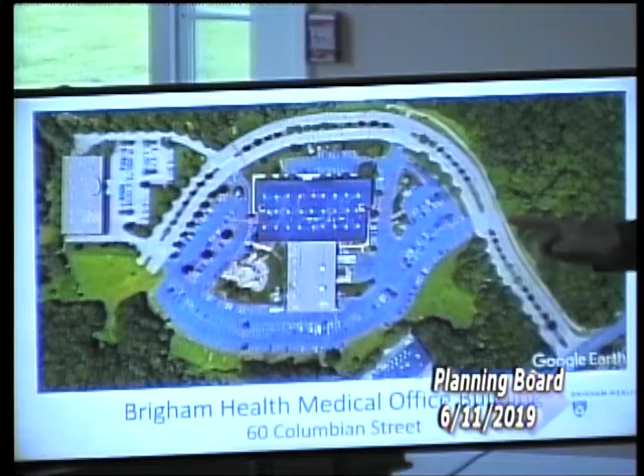I'm going to give you a little bit of background about the building. The 2-story building, which is the front building, was built in 1986. In 1994, the developer actually signed a lease with the lottery, and they built the warehouse in the back, and the lottery has been in the building since 1994. As you all are aware, the lottery is leaving the building.

Brigham looked at a number of buildings on the South Shore, and this building, for a number of reasons, including the location, Braintree, the departments that are going to go into the building. It's a consolidation of really a lot of departments that are in the neighborhoods in Braintree and in Weymouth, consolidating into the site. So if I go to the next slide, please.

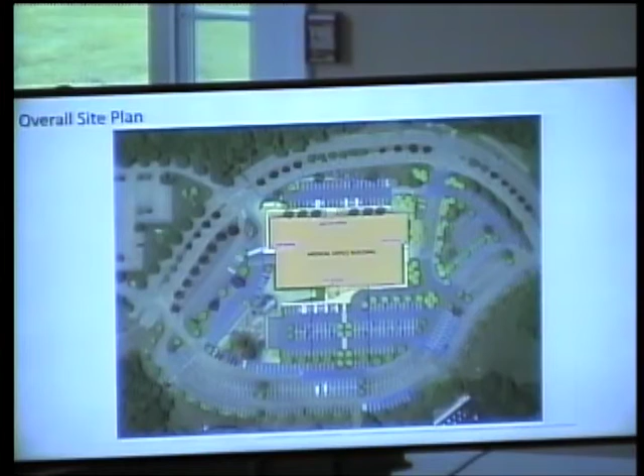Thanks, Lisa. This is an aerial of what the building will look like when it's complete. The 2-story building will stay in place, and if you see this little dotted line, it's actually the warehouse that will be torn down. It gives us a great circulation for parking. Actually, the ratio will be met on the site.

I'll let VHB, who's our civil engineer, go into all the parking ratios, but the flow that's on this now and the circulation, this will actually be the entrance to the building, and really with the volume of the parking for the patients in the front entrance of the building. Great access coming in and then flowing into the building.

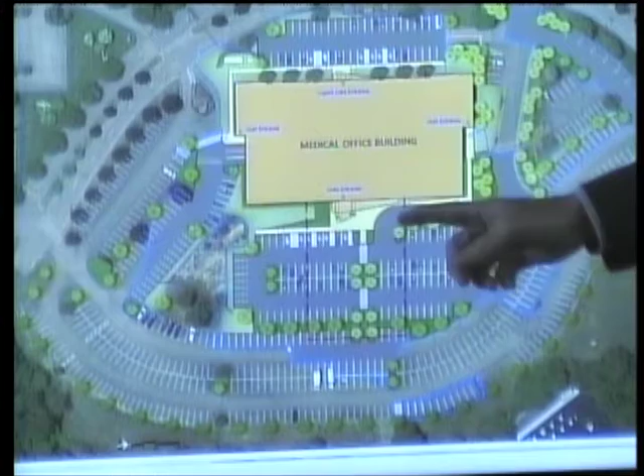The rear will be used as an urgent care, and that will be open beyond just the normal 5.5 days of business.

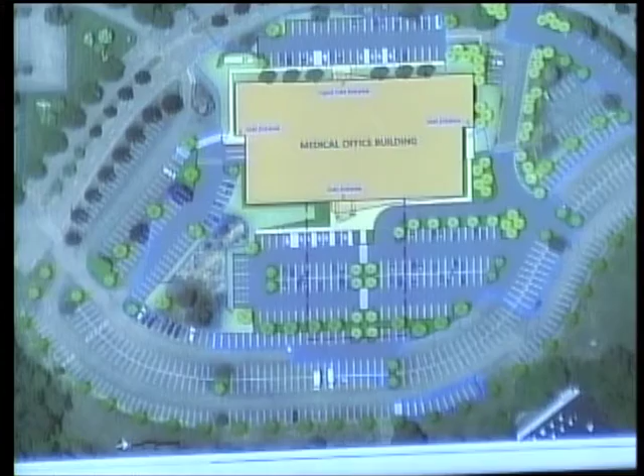That are consolidating into what will be a 90,000 square foot, 2-story building. Some of the groups going in include primary care, urgent care, multiple specialties, lab services, imaging, cardiology, surgical consult, and an endo suite. Our timing is we hope to start construction in the fall of 2019, complete construction in the fall of 2020, and open in the winter, really the first quarter of 2021.

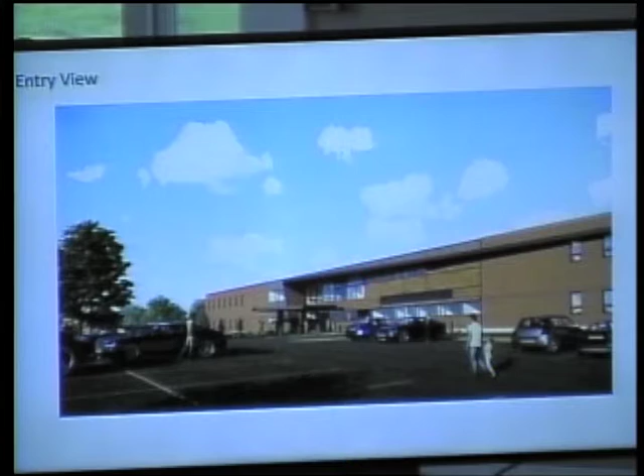One more slide. This is an artist rendering, and the architect is going to address a number of renderings of the building, but this was what the entrance will look like, we hope, when the project is complete. This is actually where the warehouse is now, this opening right here. It really will give a great vista for patients that are arriving, a lot of parking, a lot of room for patients to come and go throughout the building, with employee parking on both sides.

With that, I'll turn it over to VHB, and they can get into some of the more technical details of the site.

Good evening, members of the Planning Board. My name is Lisa Chow with VHB, the civil engineer for the project. As Mark described, the proposal is to renovate and repurpose the site from an existing office and warehouse use to a medical office building use.

This would be the third generation of use for the existing office building. The proposed medical office building is a use by right within the Highway Business District. The reason why we're here today before you is because the site plan approval for the existing office and warehouse requires the proponent to come back before the planning board for a site plan review process if there is a proposed change in use. I'd like to provide a quick overview of the existing site and then discuss the proposed improvements.

The site before you is obviously developed, as Mark mentioned. It consists of a 2-story office building with a 1-story warehouse building. It is currently the site for the Massachusetts State Lottery building, and the Massachusetts State Lottery uses both the warehouse and the office building. Access to the site is from east and westbound on Columbian Street through the signalized shared access drive. There are 4 curb cuts currently that access the site.

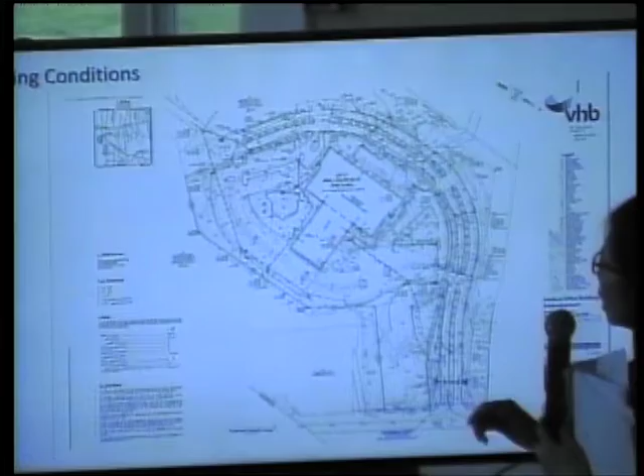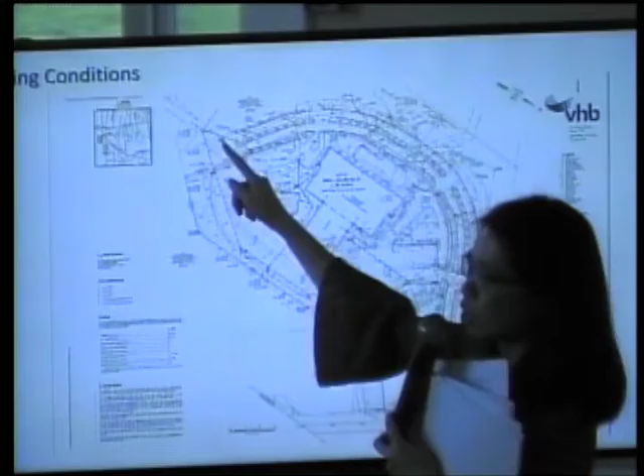Under existing conditions, runoff from the building roof is discharged to the north wetlands and the west wetlands via existing building roofs connected to storm drain pipes. Runoff from this portion of the site sheet flows into existing catch basins untreated and is then discharged to the north wetlands. Site runoff from this portion sheet flows to existing catch basins untreated and discharges to the west wetlands. Site runoff from this other portion sheet flows towards catch basins untreated and is discharged into the existing 24-inch RCP within the drainage easement to the south of the site. There is a small stretch of pervious, undeveloped land naturally sloping towards the east, and that will remain as is.

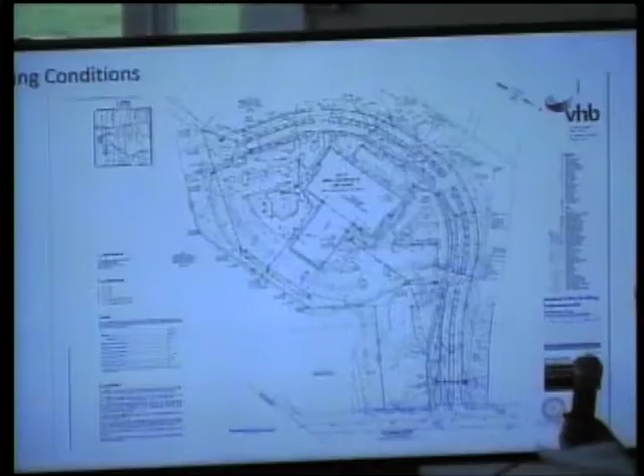So the project involves the renovation of the existing two-story building, as mentioned, to become a medical office building, and the demolition of the one-story warehouse building. The warehouse building is being demolished, as Mark mentioned, to create additional parking to meet the parking requirements for a medical office building use. Per the current Braintree zoning code, a medical office building use requires 6.67 spaces per 1,000 square feet.

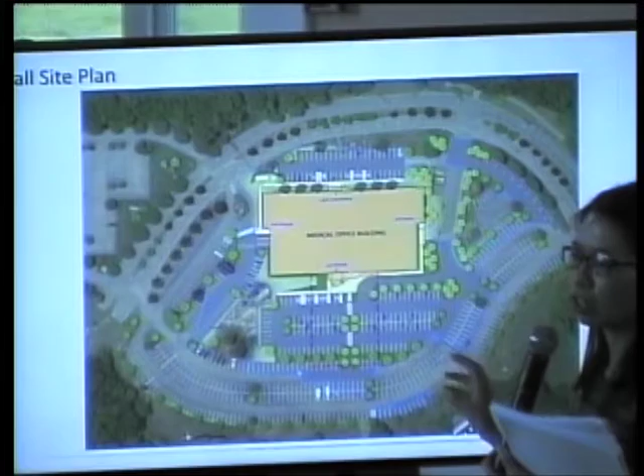The applicant and Brigham would like to propose a ratio of 6 spaces per 1,000 square feet. We can discuss that further. Under that plan, 540 parking spaces would be constructed and 61 would be put in reserve parking. In addition to parking improvements, the project is also proposing drainage improvements, landscape improvements, and lighting improvements. The original submission for the site plan review package included proposed infiltration systems to reduce peak flow rates as part of the stormwater management plan.

Since the package was submitted, additional soil exploratory work was completed, and based on the findings, we had to change the proposed stormwater management approach. Instead of infiltration systems, it would become detention systems due to shallow bedrock and groundwater that was encountered. In addition to the detention system, water quality units as well as deep sump hooded catch basins are proposed to address water quality.

There are also new trees and shrubs being proposed as part of this project. A number of trees, particularly along the east edge of the site, are being proposed to conform with the 1994 site plan approval at the request of the planning board staff. A mixture of native, hybrid, and non-native trees are being proposed. The proposed site plan will be an enhancement to what's currently there today.

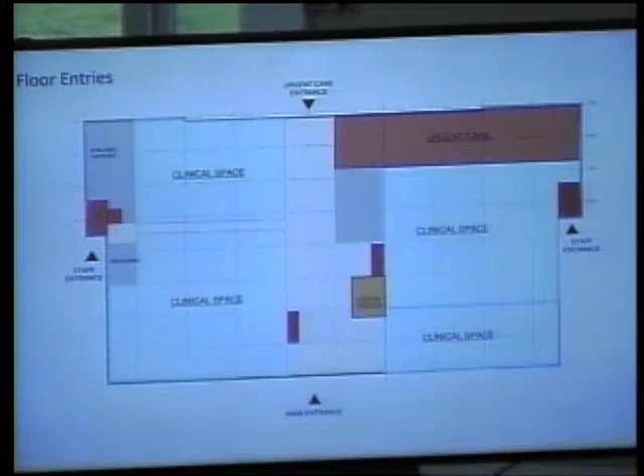Good evening. My name is Brian McKenna, and I represent the architecture, engineering, design firm CannonDesign for this project. As Lisa walked through the site, and as Mark pointed, if you were looking at this image, this is more of the internal planning and focus on the elevations.

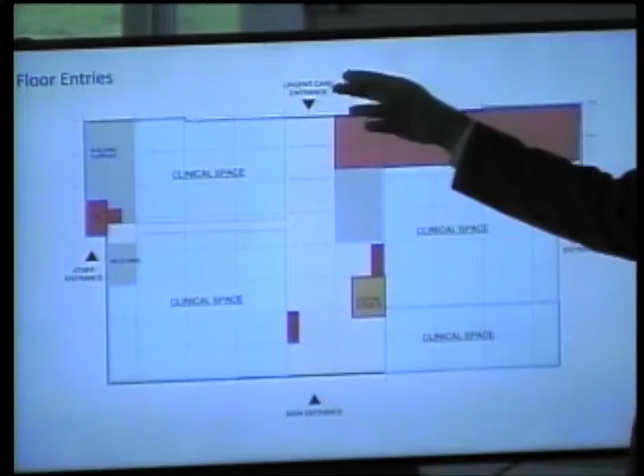So the loop road is here. The former warehouse is at the bottom of the screen as an orientation. So quite simply, our main entrance is where the warehouse was, and our urgent care entrance is where the existing entrance to the building is now. So we've located urgent care up top as it's coming in, with clinical programs on both sides of a main connecting corridor.

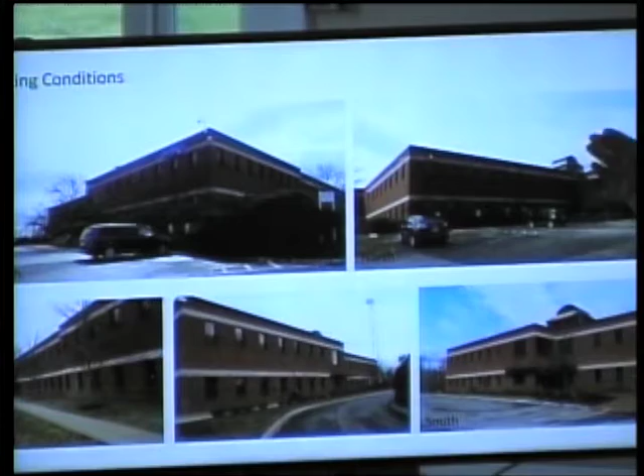We're showing existing photos of the building because, quite frankly, we're keeping the majority of the building. This is the corner as you arrive now, with the north corner and the entrance up to the right, and you go along the building, which wraps you around. You can see a hint of the warehouse in the back.

It's a brick building with punched windows. We've done the survey. The windows are in fairly good condition, and the brick feels like it's in good condition. So at present, we are going to keep the envelope of this building. You'll see consistency around the sides of the building of the brick and the banding.

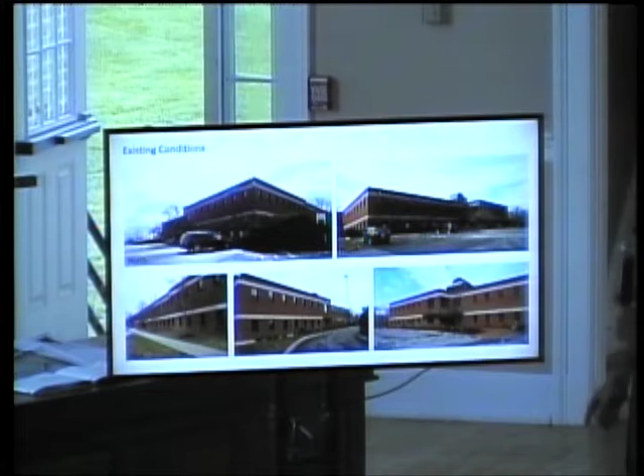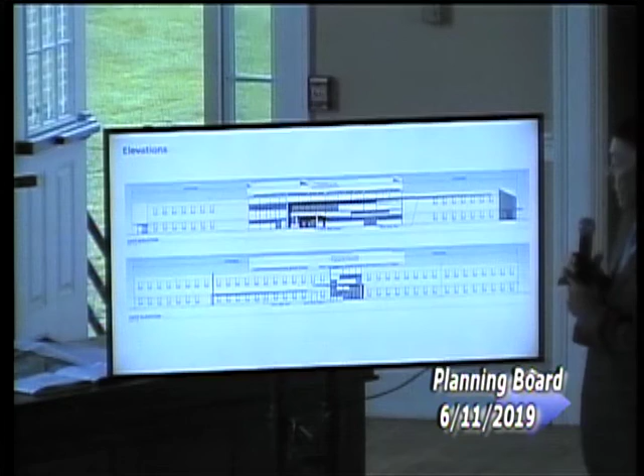We may cover, you'll see in the renderings, we're talking about coating the banding to get a little more monolithic color to the building. And on the existing west elevation, where you would arrive to the building, that's the existing entrance, and we're just extending it up to connect the two ends of the building.

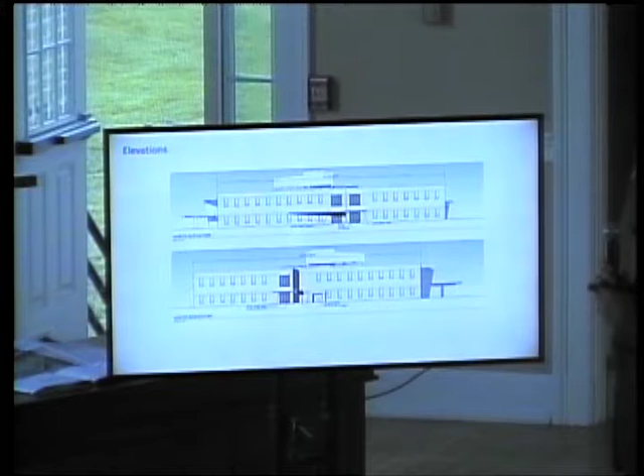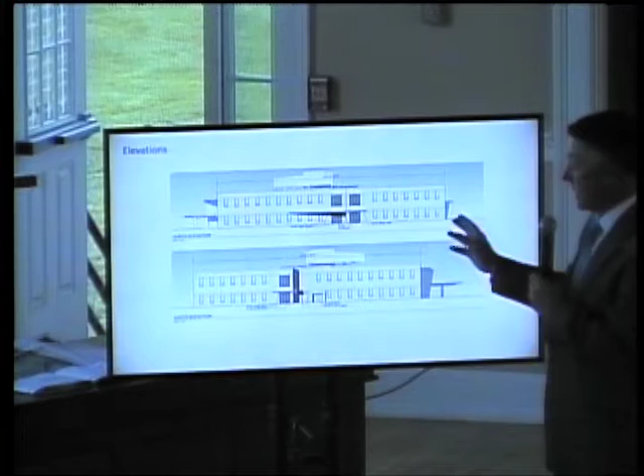On the north and south, the building is remaining pretty much as is. We've indicated canopies at what we're now calling a staff entrance, for a little more shelter to come in and to connect some of the architecture around.

And the last image you saw earlier is the main entrance, where we fill in the portion of the building where the warehouse was. Our intent is to stay in the same hue as the brick and start to bring some warm colors in and some glazing to bring light into the building.

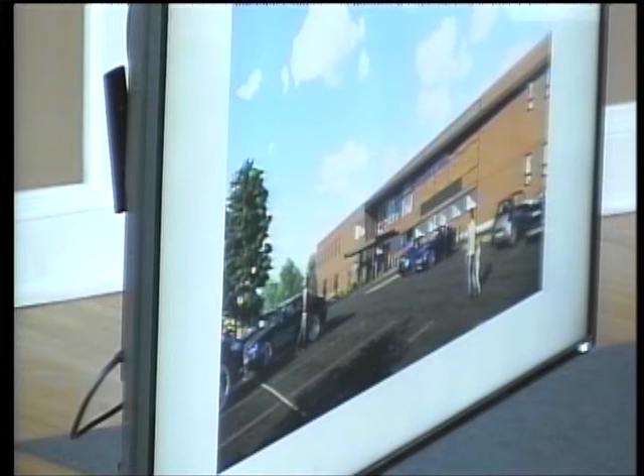Are there any questions? It's actually not the end of the presentation. That was going to be my question.

My name is David Bone. I am with VHB, and I thank you for the opportunity to present our traffic study to you tonight. Thank you, members of the board and town staff. I will attempt to be brief and just spend a few minutes telling you what we did and a couple of the key findings, and then I can, if there are questions, dive into the details later during the next portion of the meeting.

First of all, we prepared a traffic impact study looking at the redevelopment of this site. The use has changed and the pattern has changed. A medical office building has a very different pattern than an office building or an office and warehouse combination building that exists on the site. So the patterns are different, and frankly, there is more traffic that comes along as a result of a medical office building. I think that is clearly stated in our report.

What was important is that we identified the existing level of activity generated by the lottery, both when it was busier and in its current stage where it has wound down somewhat. There's still activity there, but it is not as intense as it was before.

We met with town staff early on. We had several conversations about what's an appropriate area to evaluate, and we selected about a 1 mile long section of Columbian Street that includes 4 intersections, starting at the north at Liberty and Grove, Grove and Columbian at the site access road, the existing signalized intersection, and then Forest Street at Columbian, which is actually in Weymouth, not in Braintree. We did a pretty extensive data collection effort. We counted traffic at each one of those intersections, morning, afternoon, and Saturday peak periods, trying to comply with your zoning requirements for a traffic study. I think we've done that.

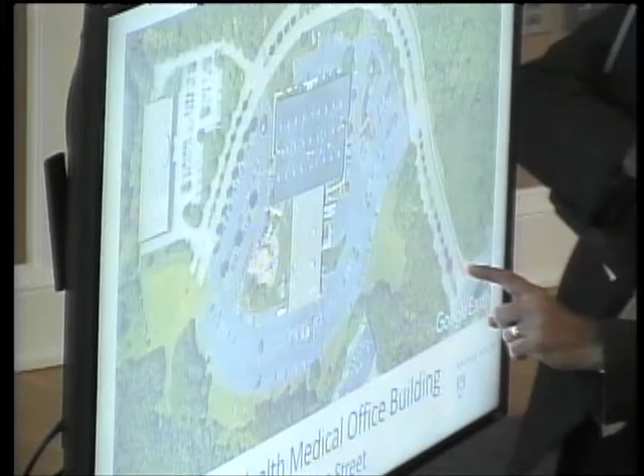The existing sidewalk along the site runs essentially from Columbian Street to this point here. It runs about halfway along the length of the site access road. It does not intersect sidewalk on Columbian Street. If you look at the graphic, figure 2, that 500-foot radius, there are bits and pieces of sidewalk along the south side or west side of Columbian Street, depending on how you view the map. But it's not a continuous sidewalk along the entire side.

Okay. I would just make a request to staff to look at that intersection. Having been a pedestrian at the intersection of Grove Street and Columbian Street, it is pretty hairy, so if it's possible to put that in future plans or whatever is happening.

Are we talking about the site drive, Madam Chair, or the site Columbian drive, Grove? There's a sidewalk on the site drive, but it dead ends to nothing. Right, on Columbia. And then at the intersection of Grove and Columbia, it's very dangerous for a pedestrian.

There's a lot going on, so I don't know. Also, I observed like a worn path on the side of Grove Street, it's all worn out, but it's sloped. It's just not pedestrian friendly at all.

It looks like people might be coming from Grove and over where Jamie's is, that restaurant in the triangle, and then they're on that side of the street, and when the guardrail stops on their side, I think people jaunt over and make their way. You can see the worn path, but there's a point where if you were walking on that side of Columbian, we were driving the other day wondering if they were walking behind the guardrail, trying to understand the pattern, but that's something we've talked to them about and we're looking at.

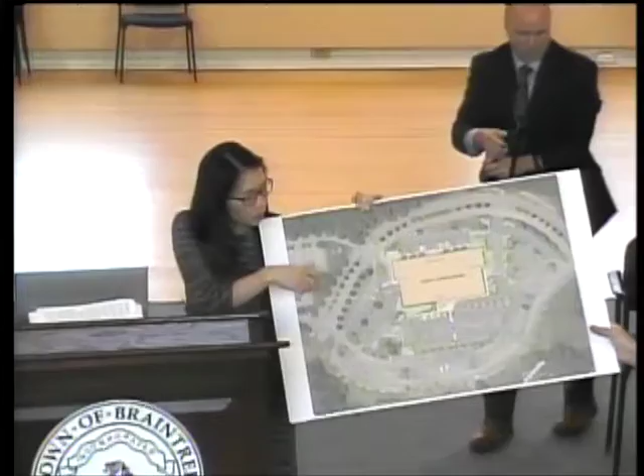Sure. If you refer to the drainage plan, or grading and drainage plan, there are 3 systems. Sorry, that projector thing kind of stopped working, so there's a system set over up here. If you could set up the easel in general, just so that they can record it, because I think they're still using that same camera. Thank you.

Could you actually put it just in front of where the TV was, if you don't mind? Thank you, you can keep it closer, like right there is perfect. Yep, there you go, perfect, great.

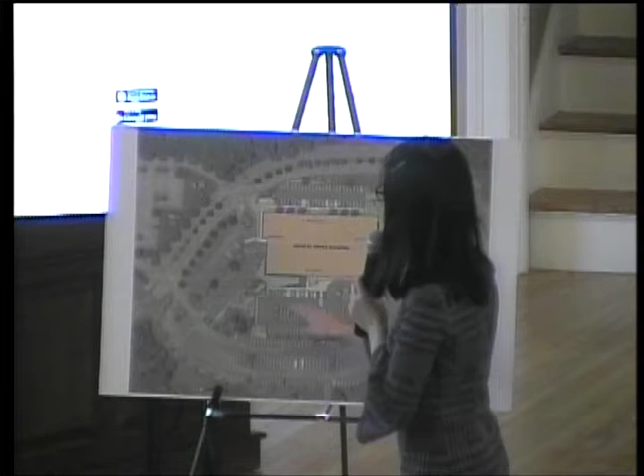So there were 3 proposed systems, one located here, one located here, as well as one here. These two, the test pits encountered shallow groundwater and bedrock, so these two are being changed to detention, and this one will remain as an infiltration system.

And then you had mentioned in your presentation with regards to parking spaces going into reserve, and the idea of the zoning bylaw requiring 6.67, and you suggesting 6 may be more appropriate with spaces in reserve. I was just curious where those reserve spaces are shown and how that would work. What would be the idea behind the initial build out versus the build out of those spaces?

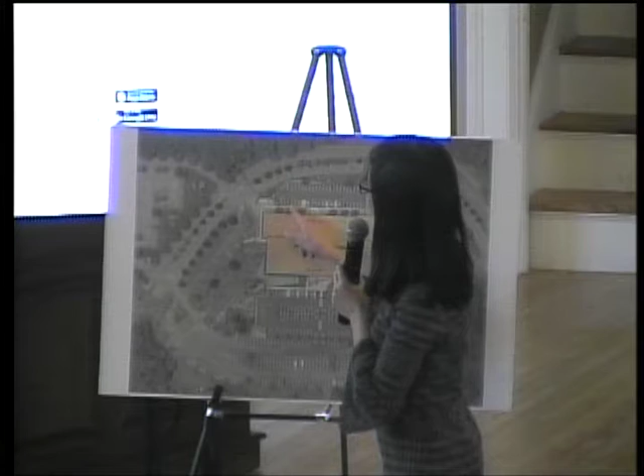So we did include a slide in the presentation, but we can circulate the exhibit to Melissa as well. So if you look on the plan sheet C102, there are proposed parking pavement lines that are dashed, and the circle is also dashed. So the reserved parking is located up in this area, in the dashed lines. Here, 4 spaces here, as well as reserved parking in this area, and this area.

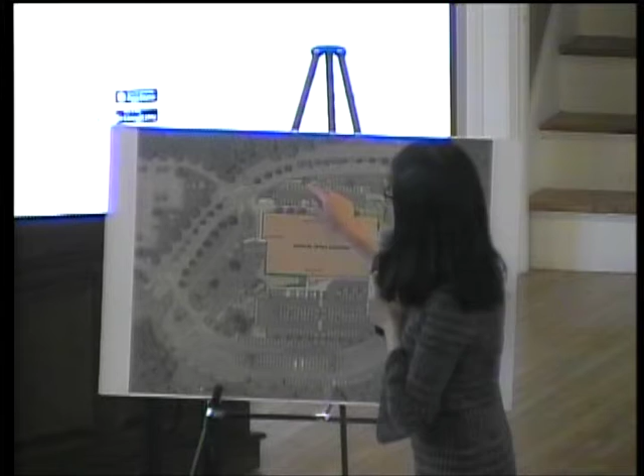The plan is these reserved parking areas equal the 61 proposed reserved parking spaces. So the plan is that these would not be built, and what's there existing will remain as is. This portion will shrink. The island will move essentially 2 parking spaces over, and then we would provide the 24-foot drive aisle so that they could circulate in this area.

Okay, I think that was the hard part I was envisioning - I could see where they wouldn't build those, but I was wondering what the interim configuration would be of the parking at the entrance if you weren't building the reserve. Yep, so we will have an updated exhibit that we can share with the planning board, but that was the plan. We would shift this island to the north and provide that 24-foot drive aisle.

All right, and the existing site does not have any existing stormwater management facilities? There's no stormwater... there is management? Oh, there is? Yeah, it's just catch basins, a roof drain system, and then it discharges to the wetland area that's when you come in the access drive to the left.

All right, so it's just a collection system at the frontage, kind of? Yep. So there are, as Melissa mentioned, 4 drainage points that the site is currently discharging to, and we're essentially in the proposed condition maintaining that drainage pattern for the most part.

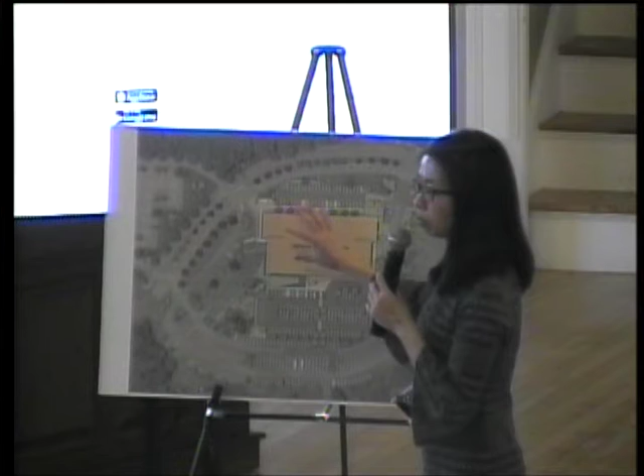Okay, and then it seems like most of the site drainage is going to remain, and you're kind of just adding to it. That's correct. In the areas that are being disturbed, the pavement areas that are being disturbed, that's where we're proposing the deep sump catch basins, the water quality units, and the detention/infiltration systems. Everywhere else that will remain as is, not being touched.

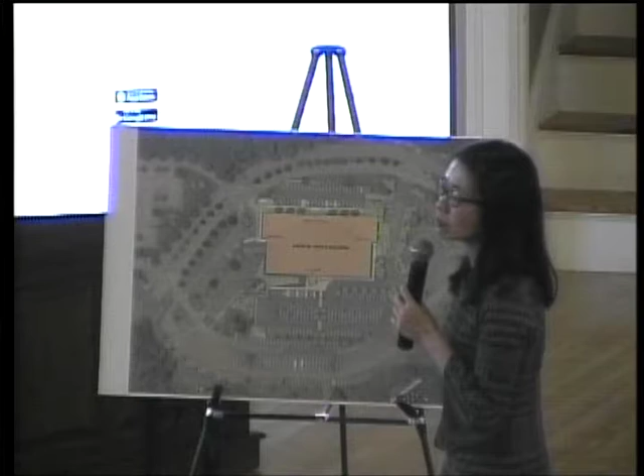Okay, I think from a stormwater perspective I am good. With regards to estimates for additional sewage generation and water consumption from the site, I noted in the report that it was 11,000 gallons per day additional discharge to the sewer system. If I can just ask staff, has there been any discussion with the water and sewer department with regards to the increase in discharge or use of water? Has there been any concerns or anything like that?

We submitted the application to DPW, and the only comments we received to date were from the stormwater manager.

So we'll be circling back with the individuals that haven't submitted comments yet, and would ask the applicant to also reach out to the water and sewer department to talk to them about their increase in fees, and whether or not there will be any I&I work associated with that as well. I'm not sure exactly what their policies are currently, but I can facilitate that discussion.

Okay, great. Are there any proposed improvements to the fire protection system for the building? The design team is looking at the proposed fire protection system, and we will have more information at a later date. Are there any special requirements for a medical building that's out of the norm, or is it just an overall update to bring it up to current standards? Because it is a medical office building, there are different requirements for fire protection.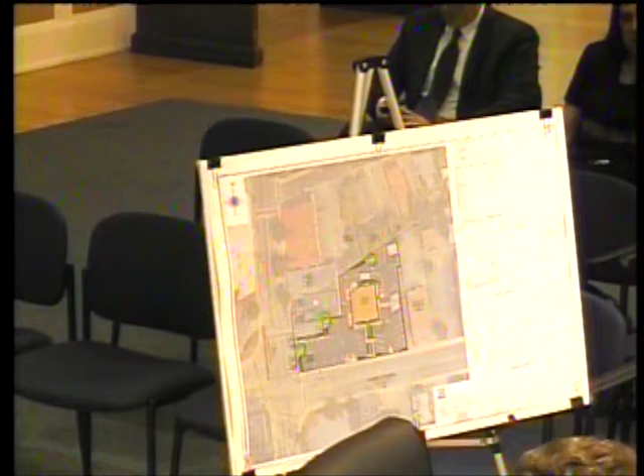We were here back in March to present the remodel project. We've since gone back to the drawing board and addressed all or most of the comments that were given that night. I'd like to briefly go over what those changes were.

The first item was addressing the non-compliance with the impervious site area. We've brought that into compliance by adding two landscape islands right in front of the building. Those are now going to be grass, really for ease of maintenance and so vehicles opening their doors aren't stepping into shrubs. Grass is really the best use of that area.

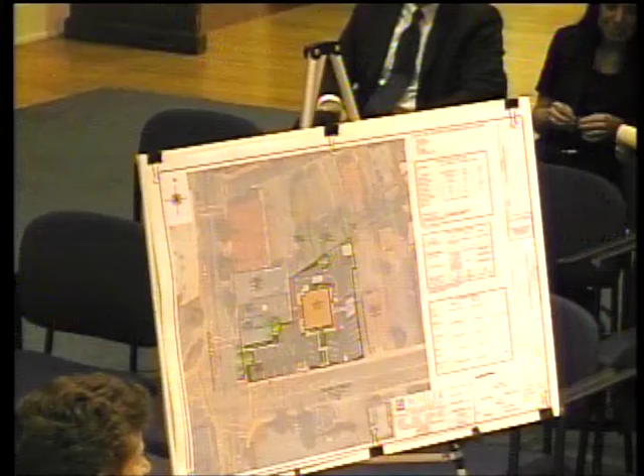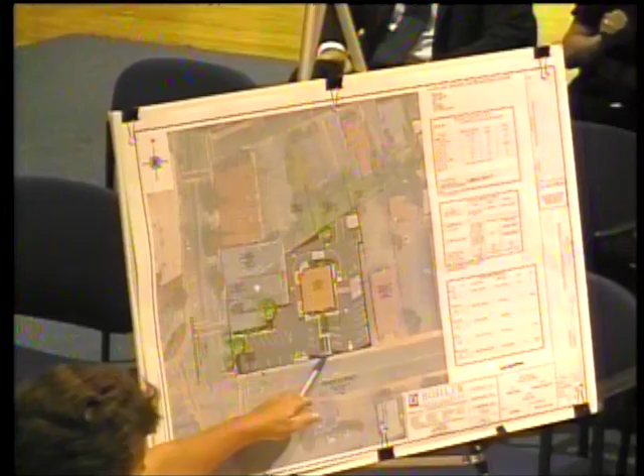The second item related to landscaping, which was loud and clear — you wanted something more. So we went back to the drawing board and added a variety of shrubs at the rear of the building, around the drive-through features, so it's dressed up a lot. We've also added plantings in the front of the restaurant, around the freestanding sign and the new accessible sidewalk connection. Those two areas are currently grass today.

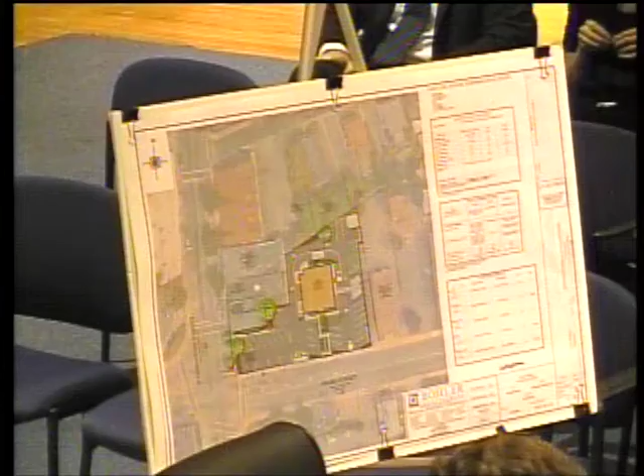Christine also asked for some additional plantings near Washington Street, and we've added plantings there, including a tree. To summarize: we added 18 deciduous shrubs, 20 evergreen shrubs, 47 daylilies as low-lying decorative plants, 35 ornamental grasses, and a red maple tree along Washington Street.

The other item we've added is to have the contractor restripe the parking areas that were not getting reconfigured. So when the site's done, all of the parking areas will get repainted and touched up.

We've already addressed the tree pruning to the rear. They will make that commitment to allow that tree to be pruned at the rear of the lot.

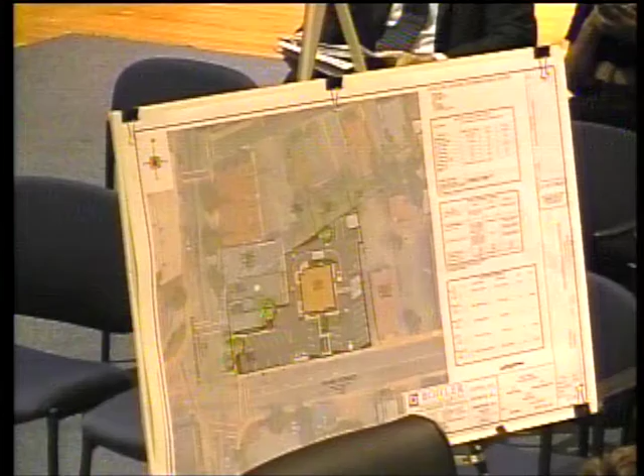And then there was a request for a drive-through stacking study. We did go out there during the lunch hour on a Friday and also on a Saturday, and we prepared an exhibit with a summary of those findings. Over those 2 days, really 13 cars were the maximum quantity counted in the drive-through lane itself.

While the exhibit shows that 13 cars can be accommodated on the site, we were finding that cars were not clustering close enough. There were very large gaps, maybe talking to their kids or whatever. So we think there's a better way to get that to work. What we proposed is a sign as you enter the site that promotes asking people to pull forward to minimize those gaps. We think that will be helpful.

Also, the new drive-through features - the digital menu board does provide a nice summary of your order right on the screen once it's made. It allows someone to read it right away. I think it'll help reduce the amount of errors in orders and speed things up. And also there's that small pre-sell board, which is a half-size menu board right before the actual menu board. Those combined, I think, are definitely going to be a better site operationally.

And then the existing entrance drive, we think it's best to leave it the way it is. It allows cars to enter next to drive-through customers so that basically 2 rows can come in. Helps keep that entry open.

So that's really it for the changes and the summary of what we've changed. Thank you. Anything from the department?

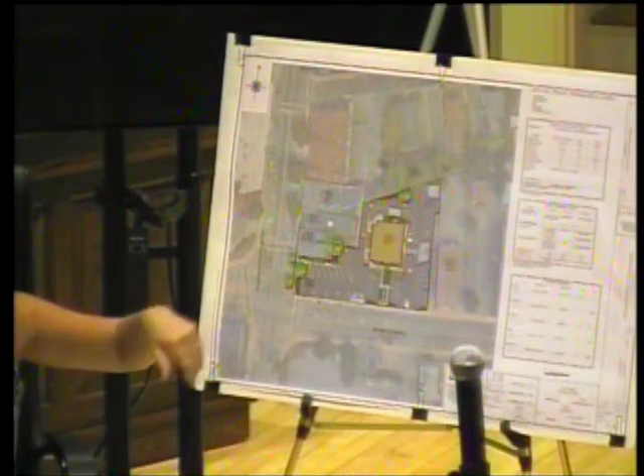But is there anything, in this area here we have this issue where we have two lanes of vehicles coming up to the light, and lots of times people are just trying to make a left out of here. At other sites we've talked about hatching that says do not block the driveway, which allows that movement, because if this movement can't come out and make that left, it's queuing up. It's not just the folks in line, it's queuing the site. It's impossible to take a left unless somebody stops and lets you go.

Yeah, so I know we've talked about that. That's the only other thing I could think of that might improve to keep that queue moving, but we do have a problem, and it's primarily drivers just hanging over the two lanes or hanging out. I don't know what the answer is to that.

And it doesn't seem like any of the improvements proposed for this is going to change the existing use or use moving forward. It's just kind of updating the styling.

Well, I think moving the ADA spots up is a safer proposal for those occupants getting out of those cars and going across. I can certainly understand why they wanted to do this. And in addition to the walkway, they're also giving the whole building a new look and the whole site a new look. This is part of your transitional upgrade with all your facilities nationwide.

Yeah, the architecture upgrades really are the bigger nut with the overall project. Just refresh it, everything.

My overall thought on the boxing out of potential roadway is that that's of benefit to McDonald's and not necessarily to the town, so I would not necessarily recommend something like that, because the queuing on their site is just limiting the amount of customers that can visit them, but potentially blocking out the street would potentially limit the flow of traffic, potentially creating issues at the light and stuff. So I don't know if that would necessarily change anything.